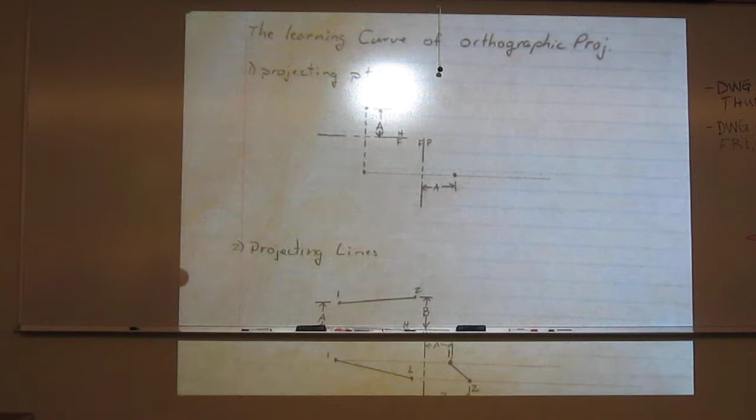Now, if you can locate a point, folks, and understand that process, then it's just another logical step to the next one, which is projecting lines. Because we're looking at geometric breakdowns, right? And a point is the base geometric unit that we have. Once we get that, it's not a huge step to projecting lines, because what's a line? It's the shortest distance between 2 points.

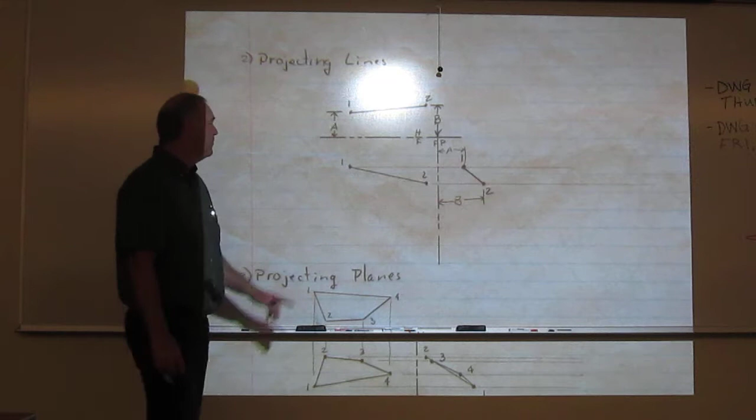So now we take 2 points, and we take just a line. We can project that, due to law 1, right into an adjacent view. Once we have those two, we can use the other laws to locate that in any other view. So we start with points. Does everybody understand points? How we project them?

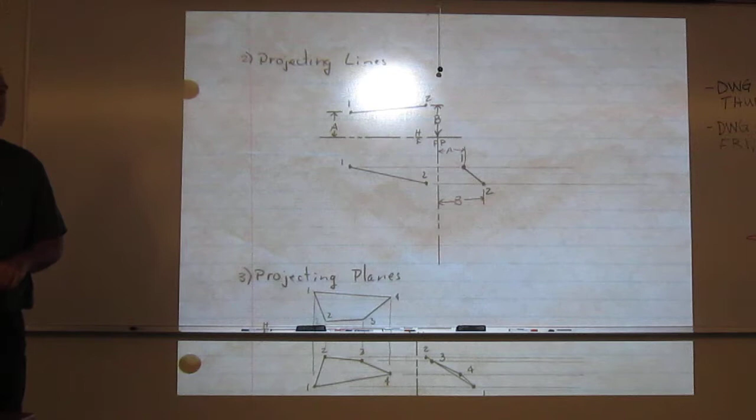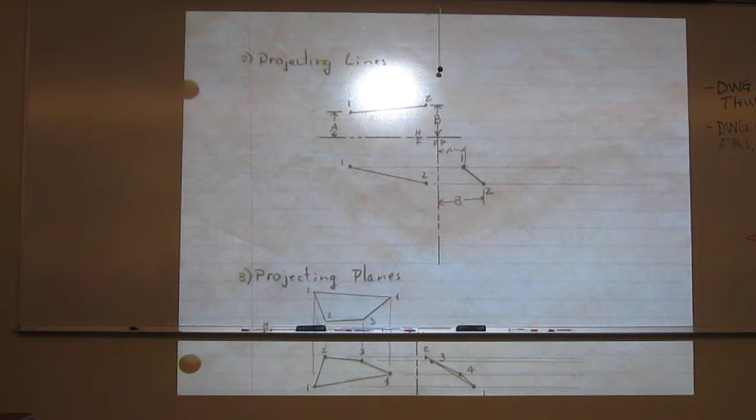Then lines are the next step where you're doing 2 points. Their level of complexity jumps by double, but it's still the same process, right? You're just doing it again. Then we go to planes, and planes can really have kind of an unlimited number of points, but there will be points or vertexes that define those planes.

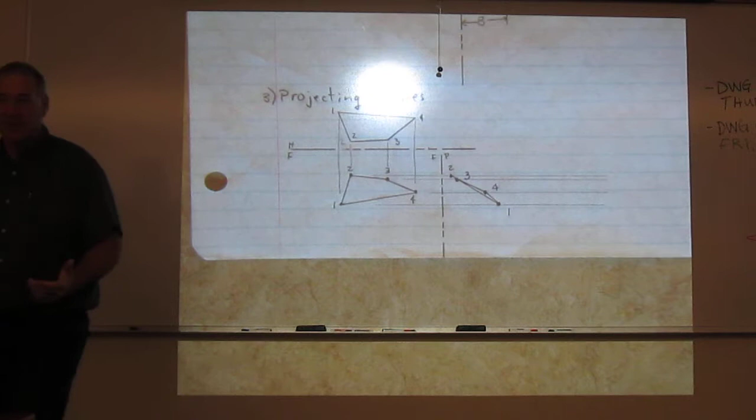Again, we can take these planes, instead of looking at the whole plane, break it into points, because we already know how to project a point. Now we might have 3 of them, 4, 6, whatever the case might be, but we use the exact same process all through it. At the end of it, we end up with a 3-view drawing.

So that's really kind of the learning curve, at least in my opinion. I know a lot of times people will start really at the third part here, where you're looking at planes and trying to project those. I think probably many of you have been very confused by that process. As you look at these planes, you wonder: what is this plane? Is it normal? Is it inclined? How's it going to project?

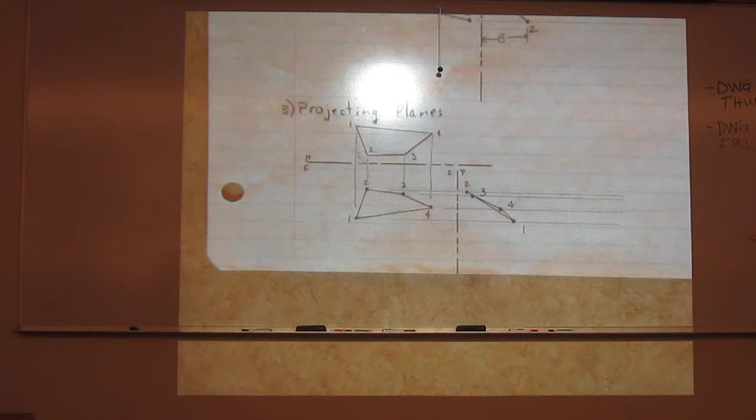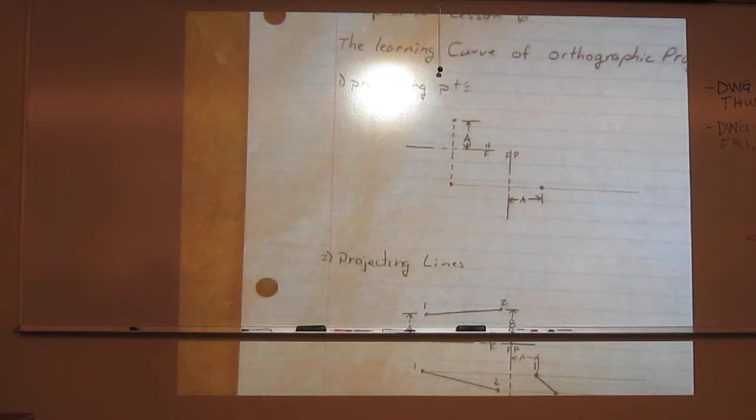Well, don't forget, you can break that plane to lines, and you can break that line to points. By doing that, then following the 8 rules of orthographic projection, you'll get a successful result when you do these. Now, the author has a bunch of stuff at the end of the chapter that might be useful for you in the visualization and application of these skills. We've talked about some of these already, but let's review them. First one, let's go to figure 1070.

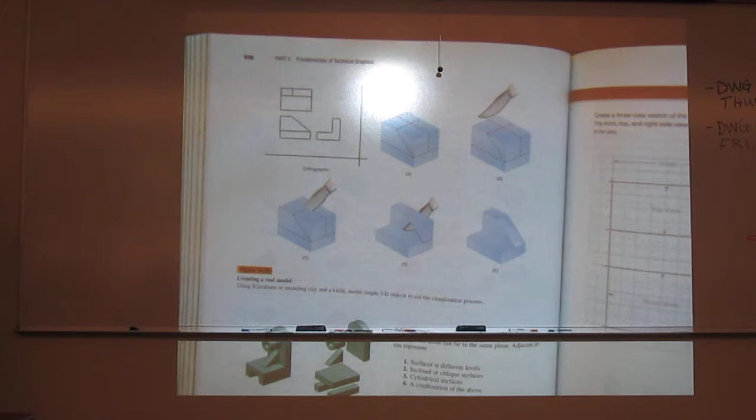So a visualization tool, clay. It's a pretty good process. I think some of you have really taken this on, and I would ask you out there, those of you using clay, is it useful to you? Sometimes if I get it right. If you get the clay model right. Okay. But if you do get it right, then it's extremely useful. Oh, exactly, yeah. And it's a process, kind of like the author states here.

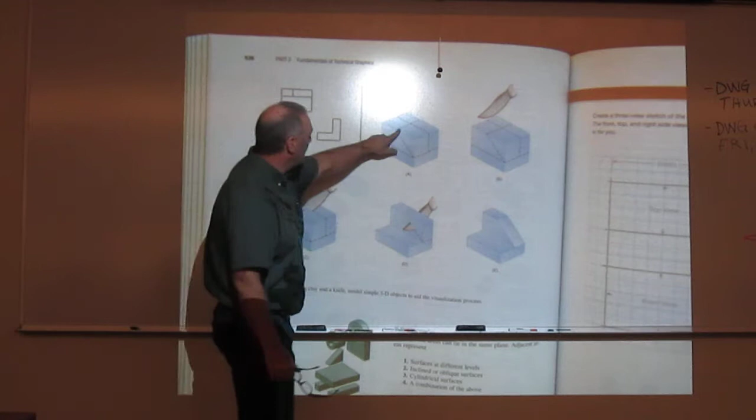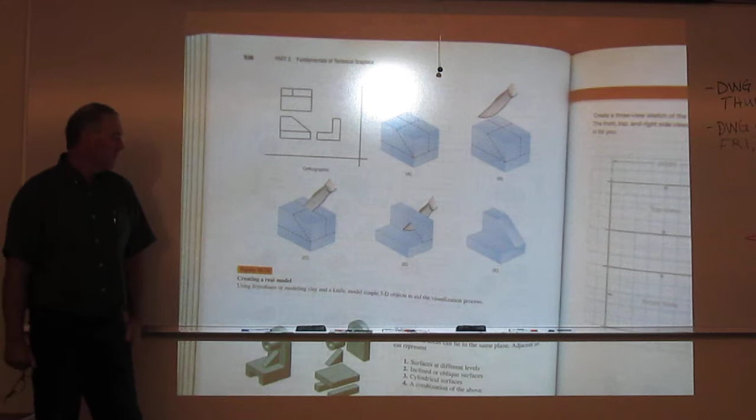The way to do the clay is start with some cube that has the overall dimensions. Take the tip of the blade and sketch your views on the sides that you pick. You're just taking the tip of the blade and outlining everything. They don't have to be exact with clay. You're looking for shapes and how they're going to appear. Then once you do that, you start looking for lines that match up. And you say, oh, that one's got to match here, so therefore those two are related. Now I've got the same vertex point between these two surfaces. By the time you get to the end of it, you got the completed result.

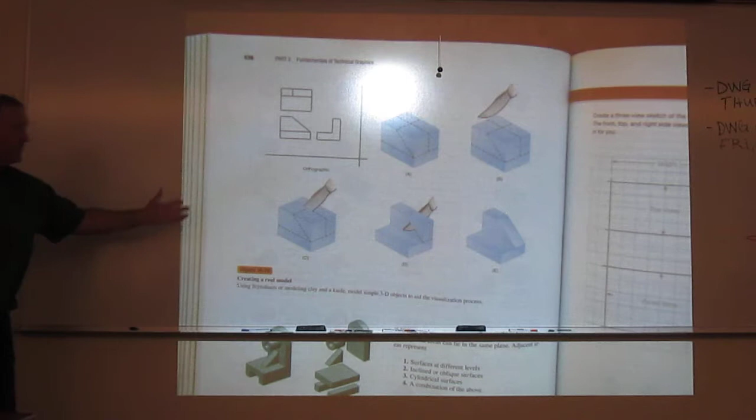Keep in mind, when you take the test on Wednesday, I'll allow you to use the visualization tool of your choice, because I think it's part of 3-view drawing. If you're using clay, since we don't have enough for the entire room, and we don't want a mad scramble for the test, because we only got so much back in the drawers, if you want to use that as a visualization tool, get your own. So clay models are a great way to go.

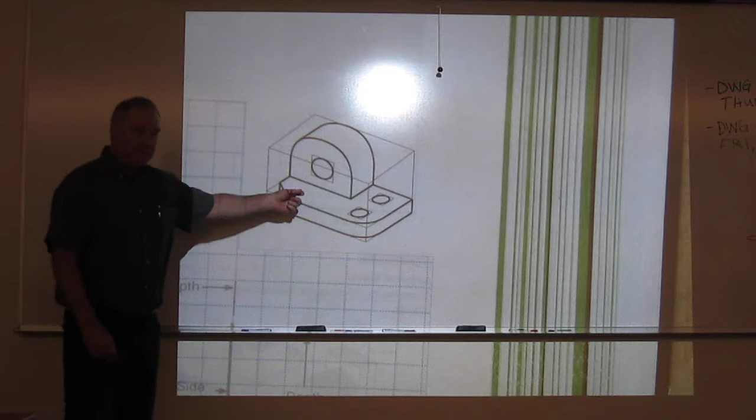Another way, and I think probably the majority of the class is using this one from what I've seen: sketch isometrics. It's really, in essence, the same thing as a clay model, but you're providing a 3-dimensional pictorial view so that it helps you visualize. Some of you are sketching these. Some of you are doing them on the computer. That's fine with me. And yes, if you do sketch isometrically on the computer for your test, you can use it as a tool. So this will be one where I don't make you close the computer down, but you can only use it for the visualization part.

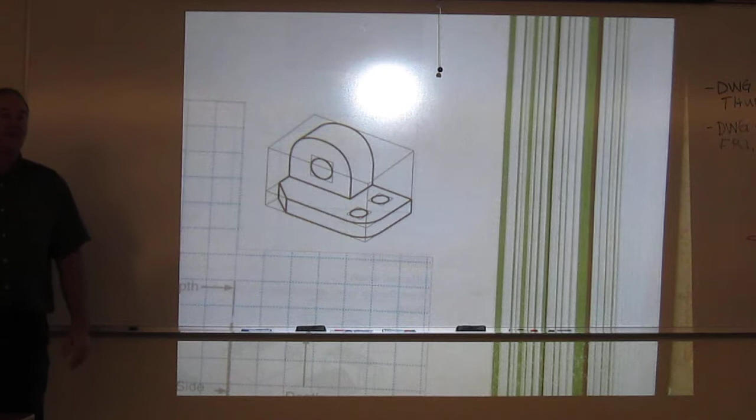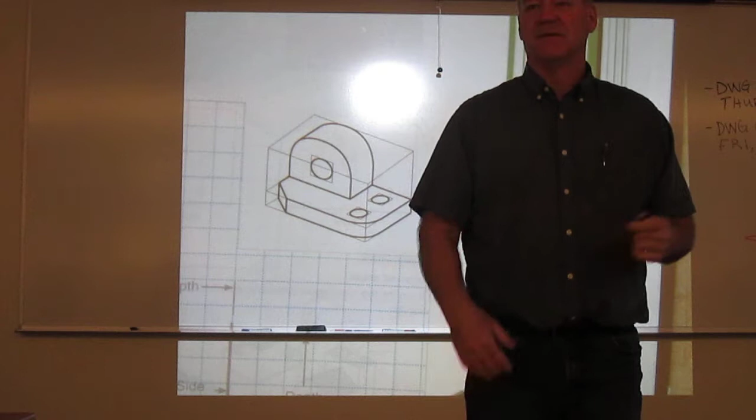How many people are using isometrics? Yeah, I thought at least half of you. You guys know we have a bunch of isometric grid paper back here in the drawers? Now, we don't have enough to just start wasting it. What really works well is grab a piece of vellum and set it over top of the isometric grid and then just sketch on it. That way you use the same isometric grid several times, and those little packets are fairly spendy as far as paper goes. So if you do that just to make it stretch a little further, that would be nice.

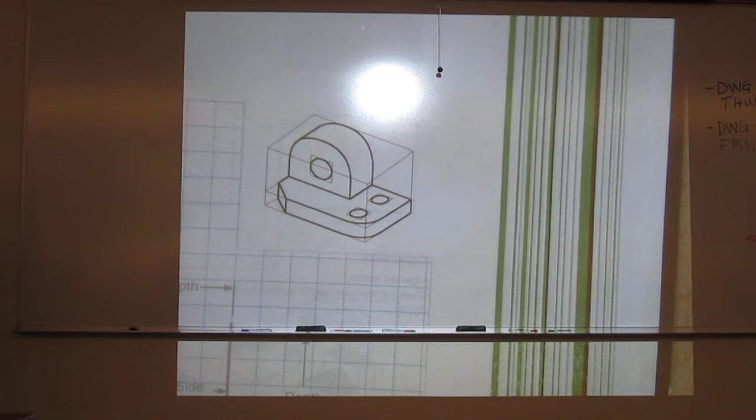I've actually even got a drawing that's an isometric grid that I print off real thick, and I can see it through bond paper, and I just sketch on bond. That's cheaper yet. Not that we need to watch the pennies that closely, but we do have to be economically viable. Isometrics, great visualization tool.

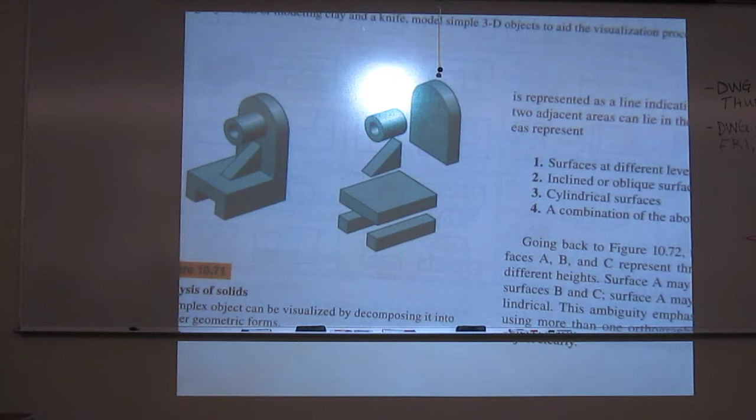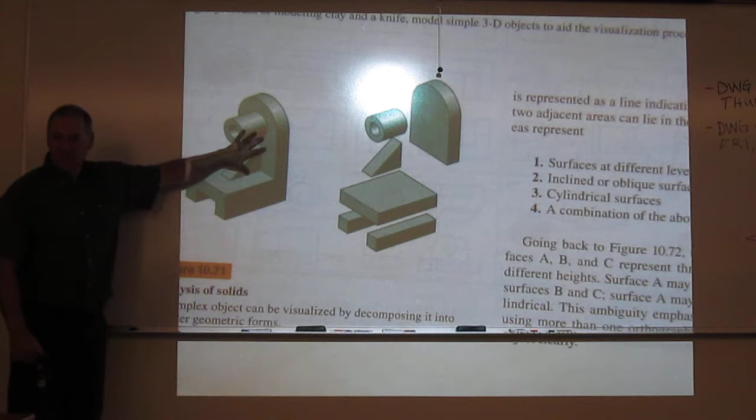If those two fall down for you, then the author gives you a couple other ones. We've already mentioned figure 10-71. We mentioned this way back in drafting 131, and I think quite a few of you deal with this. A couple of you, when we talked about drawing, said, I look for shapes. Well, do your geometric breakdown. Break your object into shapes: cubes, rectangles, triangles, circles. You might have positive shapes, you might have negative shapes.

But if you break them into these surfaces, then you can go back to some of these other pages we talked about, and you'll know how they're going to project. The other one I'm talking about is page 535. Because if I know what a circle appears as, I come right to page 535 and find, oh, there's a concentric circle cylinder, negative, positive. How's that going to project? In this case, this is a counterbore hole.

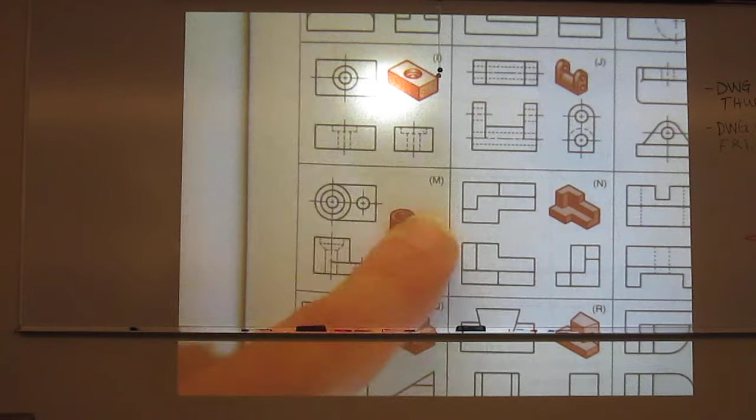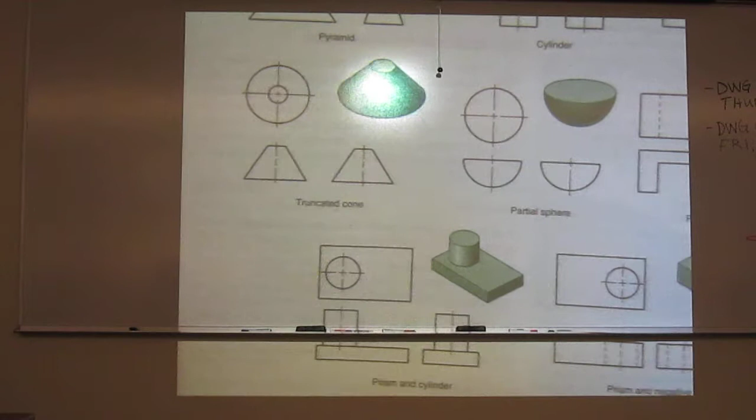So you can go ahead and look at those. There's another page that we also threw out on that didn't have all of the objects together. It had the individual shapes, and this was on page 522. Remember this page? Where we started looking at the different 3D primitives that we got back in 131 and then how they projected. So a couple good resources for you if you do the analysis by surface or the breakdown of objects.

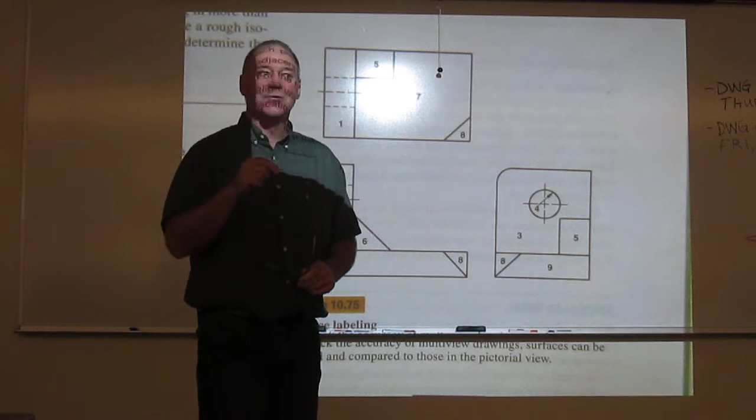The author brings a couple other items in. If you look at 10.75, these are kind of checks. They call this surface labeling. This is when you have a physical object or an isometric or a clay model, you finish your multi-view drawing, then go back and look at your individual surfaces. Just because you draw that last line, folks, on the computer, and you say, it looks good to me, print. It shouldn't go in that box.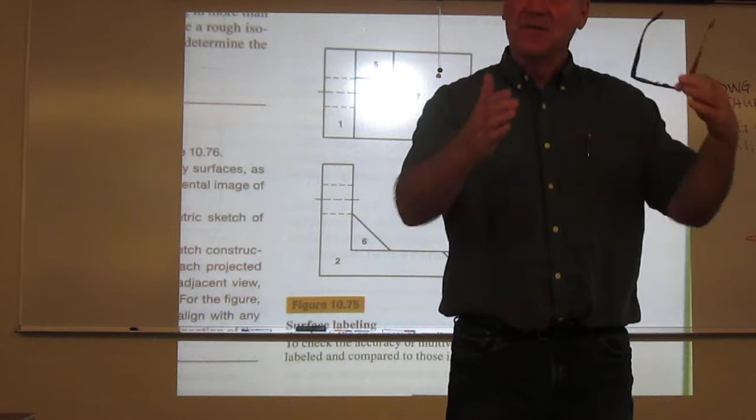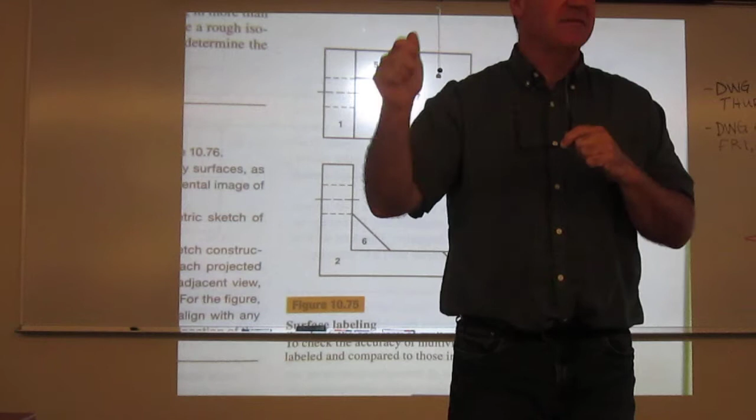You should pull it out, sit at your desk, put a scale on the thing. Does it really scale 1 to 2? Does it really scale 1 to 1? Okay, check all that stuff. There's really nothing more embarrassing than in workforce, turning in a drawing to somebody and they said, well, aren't we doing this at 3/4? And you got the thing at 1.5. Yeah, well, that was part of the instructions. So check that stuff. Make sure you got it right. Do a double check. Remember the old highlighter thing. Highlight that. That's done. That's done. That's done. Run it by a peer. Those things are all done in the workforce.

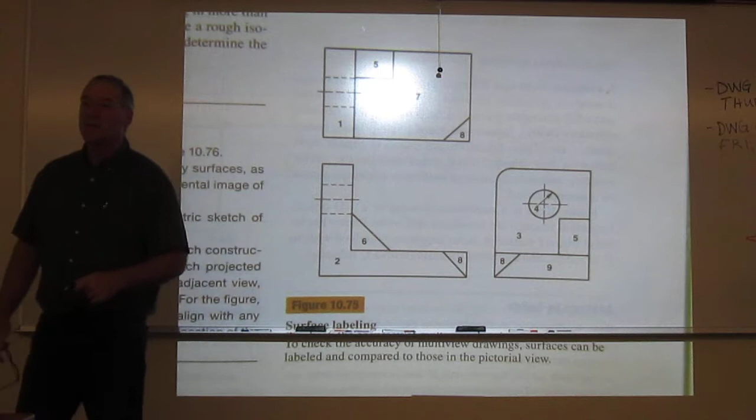Now on this one, what they're doing is they're just saying, okay, I'm going to label this surface 1, and then we'll go and make sure on my other one, this is what I'm getting. On the top, I got a rectangle, I've got an edge here, I've got an edge there. Yeah, okay, that's a normal plane, that's what I should be seeing. So I'm kind of analyzing it after I'm done. Doing a check. So analysis by solids, or surface.

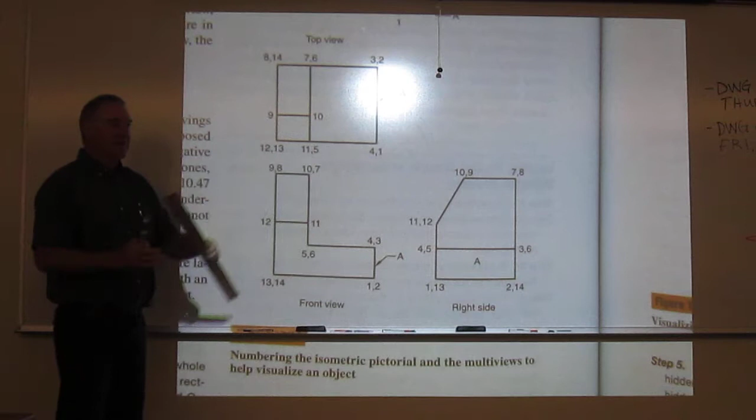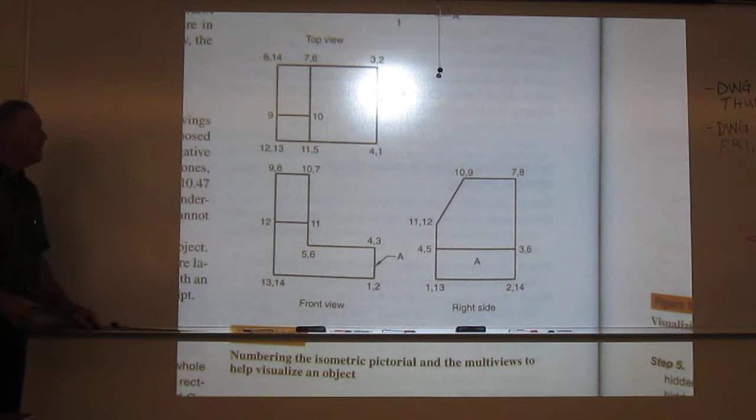So whenever you do this, put the point that is closest to you first, the one that's away from you second. So if I'm looking at this top edge, you can see 9's right here. Well, it's closer to me than point 8, which is at the back. Okay. And that will keep those in order for you. Again, point labeling. And when I get oblique planes and I have to do 3 or 4 rotations to display these things, this is really the tool that will keep my mind from going nuts, because I'll be able to track those numbers as I go through in these different rotations. Another really good technique.

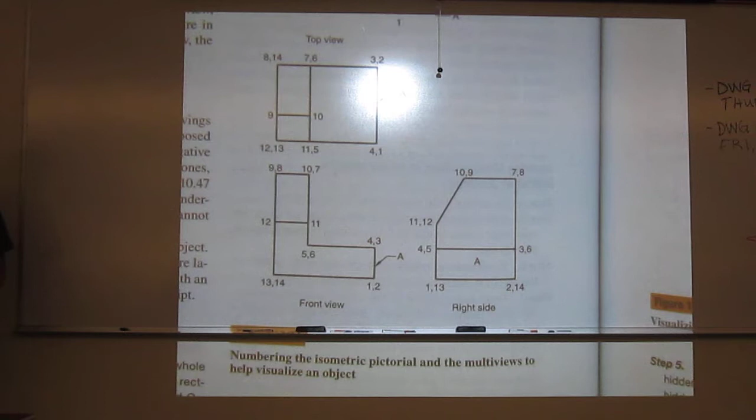That's the ones the author kind of gives you. Are there any others out there that you folks have just kind of found out on your own and say, this works for me? Or just draw it and hope for the best? Okay, well, those will give you a base. Again, these are just techniques the author's thrown out that a wide part of the population has success with. It doesn't mean it's the only way. Okay, like I've mentioned many, many times, all our minds are different. We've got to play with it. We've got to steal from one idea, steal from another idea, and blend them how our mind works. And use those to get a successful completion. And really, the only way to steal from these ideas is to try them. Give them a try.

All right, we have three things at the end of this chapter that we do need to talk about. And these are some conventions to clarify the drawing. Remember, when we do a drawing, really, all drawings need to follow only 3 rules. And that's the 3 C's. And we've listed hundreds of guidelines, and you use these guidelines to get to the 3 C's. Does anybody remember what the 3 C's stand for? Clear, concise. Yep. Clean. Clear, concise, complete. Okay. These 3 conventions we're now going to talk about are in the clarity stage. So when we get projections that are extremely confusing, we're going to do some things that break the rules of orthographic projection, but they clean the drawing up. Okay. That's what these 3 items are.

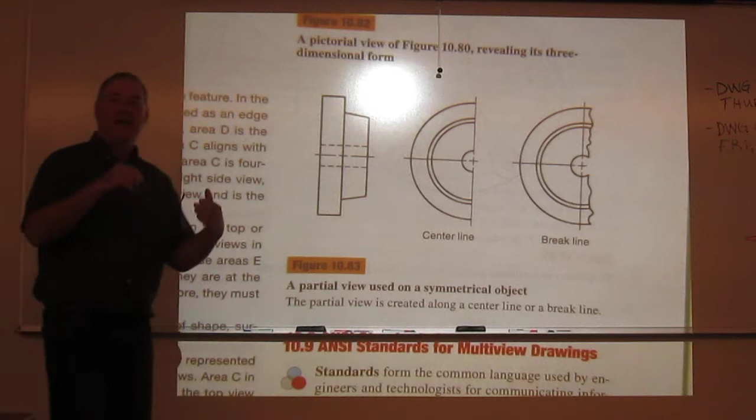So the first one is a partial view. Let's go to page 543, figure 10.83, and let's look at what a partial convention is. By the way, this is a convention. It is an accepted deviation from a standard, right? Our standard is the glass box, orthographic projection.

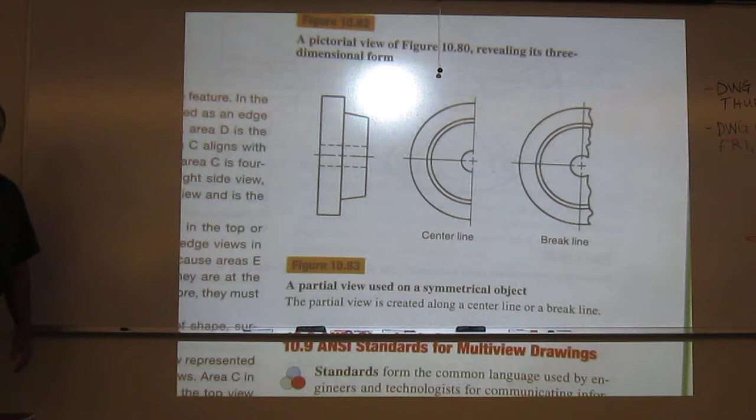Since it is a widely accepted deviation, we do not have to tell somebody when we pull one of these out of our toolbox and start to use it. Okay? It's just assumed that the reader will know. If they don't know, that's their problem, not ours. So the first one's a partial. We use a partial view when the original projection adds no new information or leads to a confusing projection.

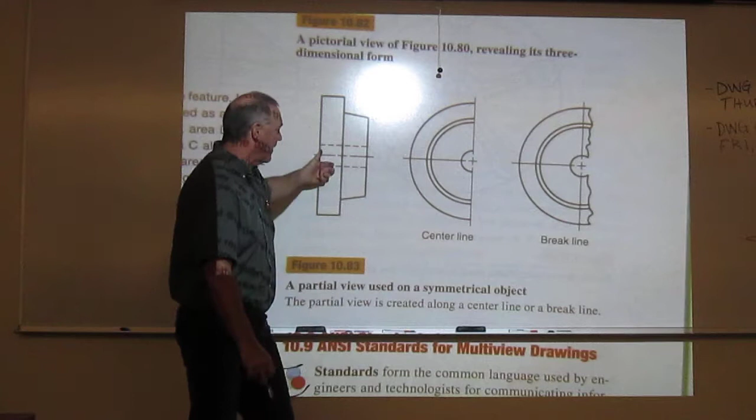So this is an example of doesn't add any new information. Here we have a front and a right side view. Okay. So this part right over here is symmetrical. Do we really need to show it? No, we don't. So you can break it one of two ways. You either break it on the center line and you leave half of it off. They know the information is right there for the whole thing. Or you take it slightly past it and you use a short break line to display that break.

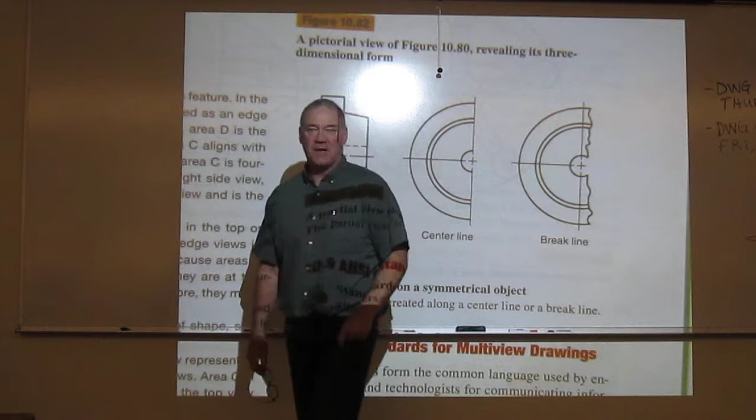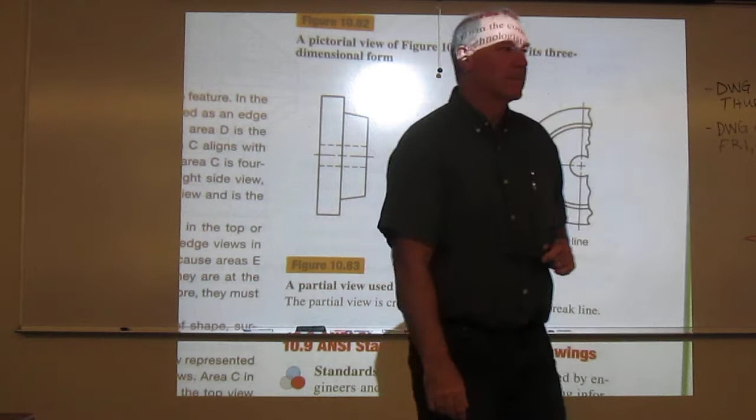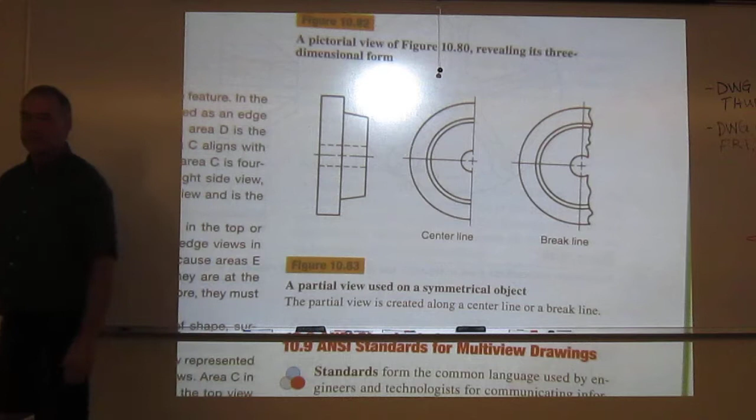Remember, a short break line is a hand-drawn line to represent how the object breaks, and it's very thick, right? It's on the border layer. So you can use either of these. Works great for symmetrical objects. It doesn't have to be a circle either. It can be any symmetrical object. So this is a good one for circular things, or, as I said, symmetrical. There's another example on the next page at the top.

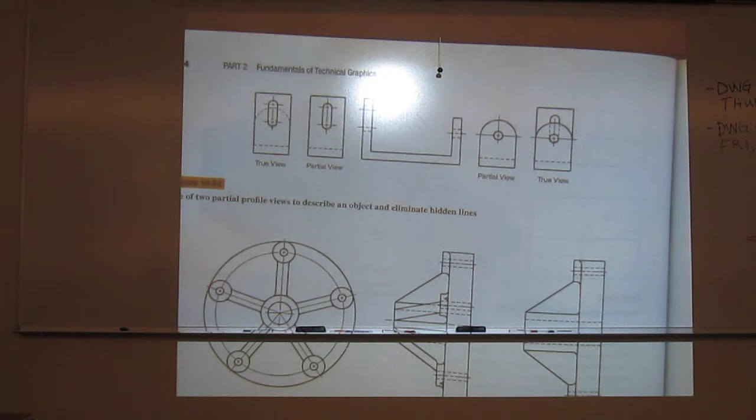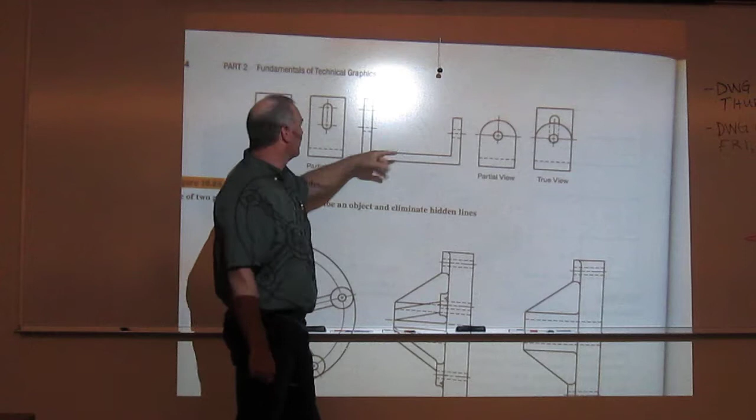This is on the partial views. This is really probably the one I use the most. So in essence, we're given a front view. Here's our object. It's got a couple arms coming up for some reason. I'm guessing that maybe a shaft goes through here or something like that. So here's our front view. This is the true projection, where we see this one right here, and then right behind it here. Now, that's a pretty confusing view, because everything kind of lines up, and you start thinking this surface is here, this surface is here. No, it's not. It's completely on a different portion.

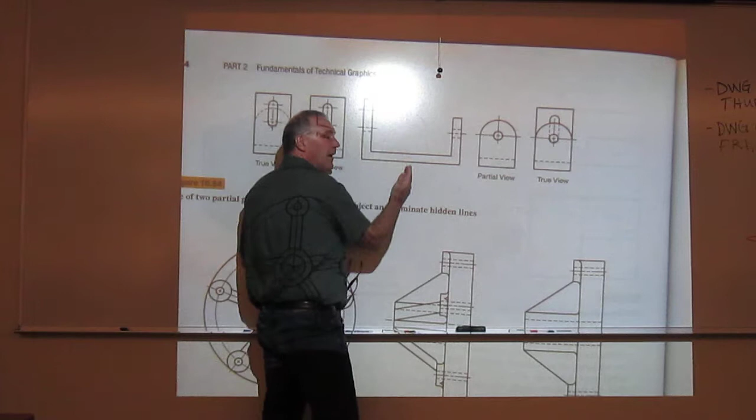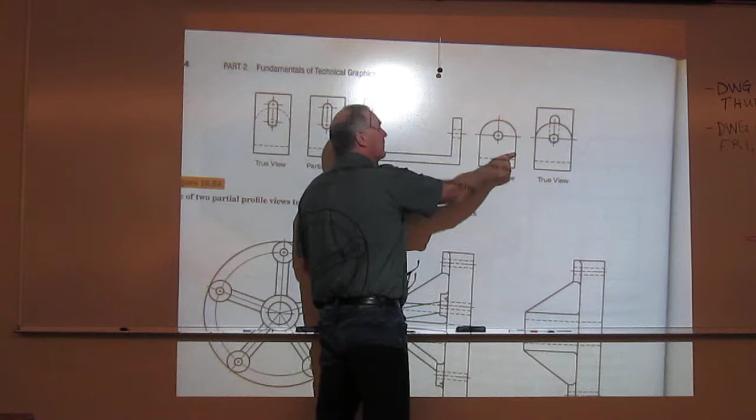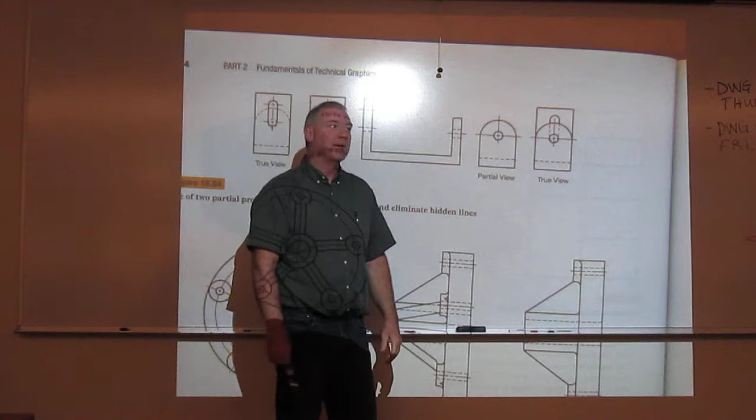And so what we end up doing is we end up just kind of breaking the object right here in the middle. We're going to break it, we're going to rotate it, and only display that portion. So they turn it, get it to here. That's real easy to read on that end. Fairly simple construction. Much easier to identify what we're trying to build, I guess might be a better way to say it. Then we turn the left side view for this one. Now we're given two great looks at that one and that one. No mistakes are going to be made. Easy for them to read.

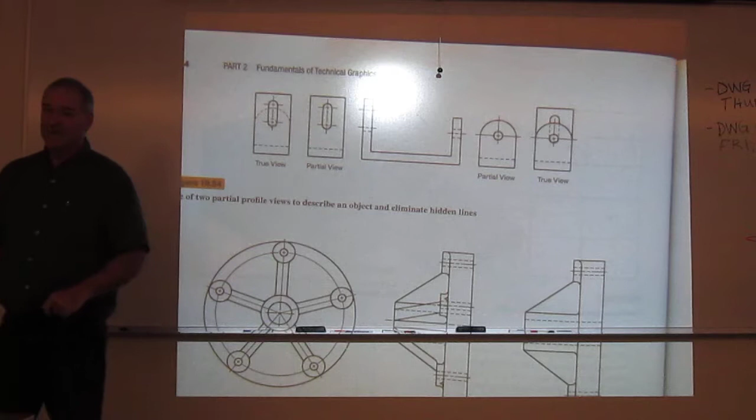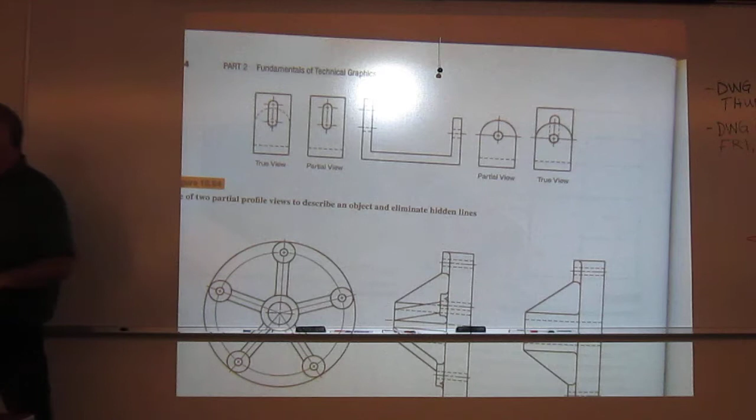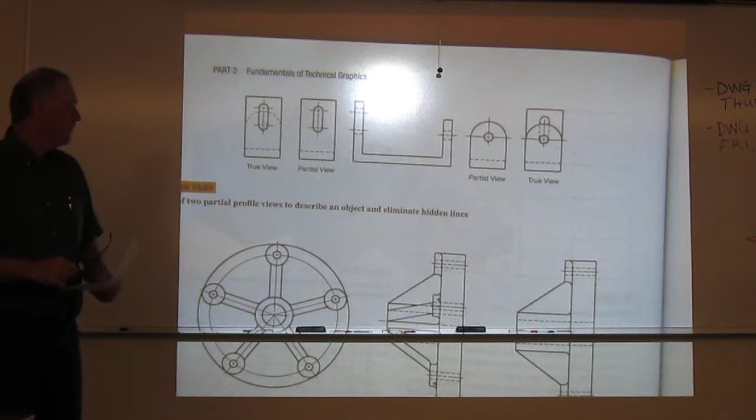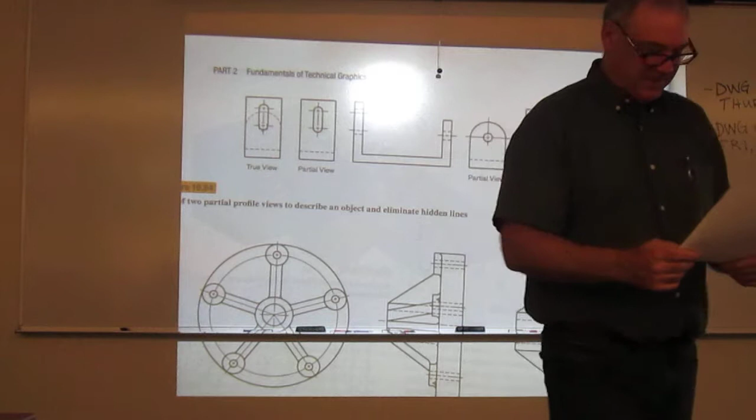Okay. Here's my true definition. Object not entirely shown due to confusing projections or redundant information. Maybe I should have read that. The first example was redundant information. This one's a confusing projection. So let me state that again. Object not entirely shown due to confusing projections or redundant information. So you'd use a partial view in the place of a multi-view. Yes, you're still doing orthographic projection. But if we were looking at a left side view looking this way, this is the true projection the glass box gives you.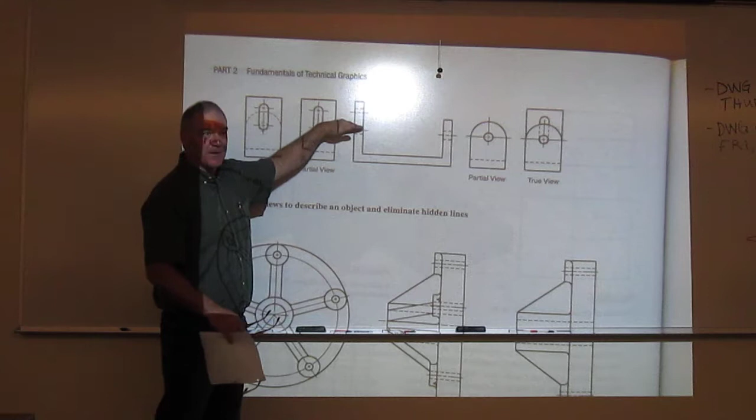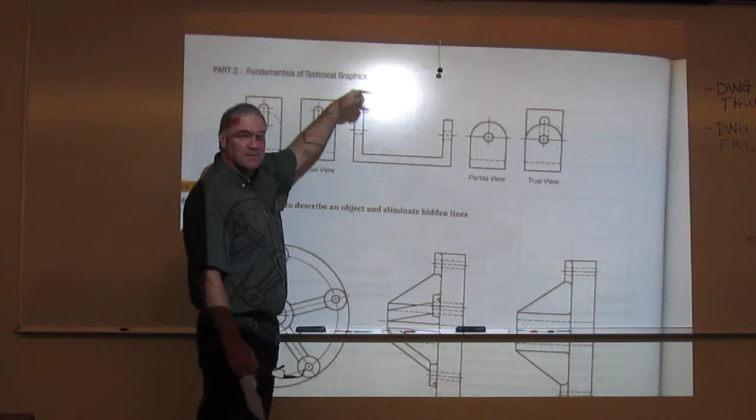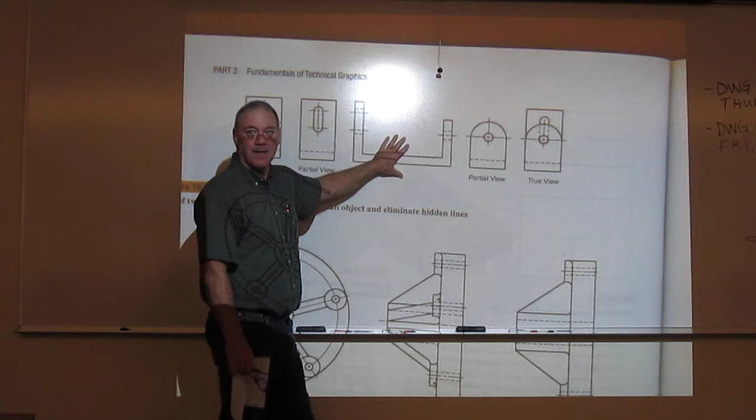So what we're going to do is just chop it off. Boom, I'm just going to go here. I'm only going to rotate this over, give them that projection. Now this one requires three views, maybe even a fourth because I got depth; I might do the top also. But I'm getting the front view. That gives the orientation of these arms in relationship to the base. They've got that information. Then they only need information on this guy and this guy. So we're going to rotate this one and that one as opposed to the true projection, because they're confusing. Okay, do you get it now? Yep.

Bottom line is you can pull this out of your toolbox in more than one place. By the way, I love drafting toolboxes. They're light, but they do get pretty filled up and cluttered until we get really used to these things.

Any questions on these? The partial convention: the object not entirely shown due to redundant or confusing projections.

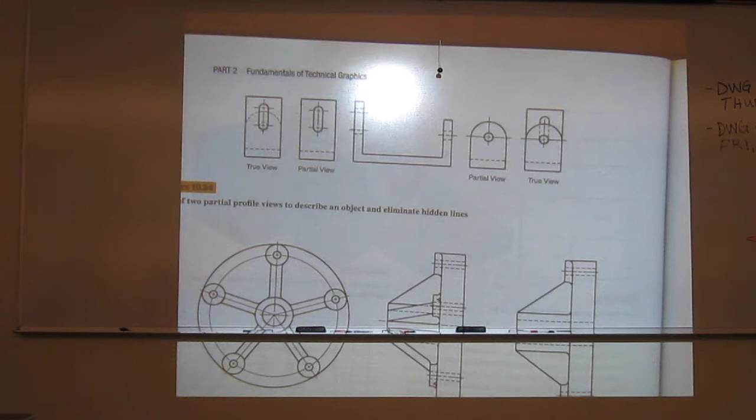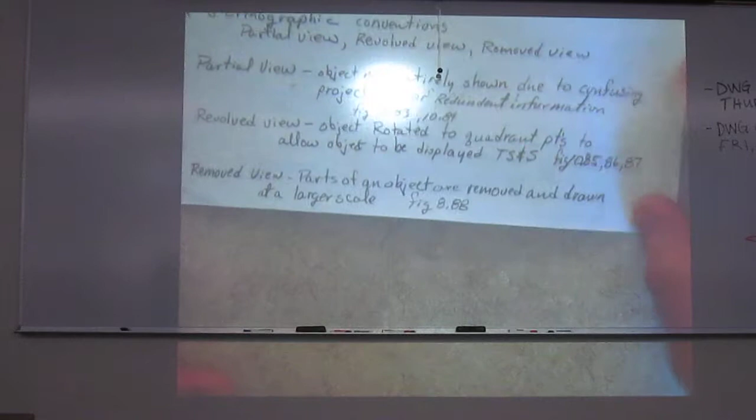The next one is the revolved convention. I'm going to put my definitions up here so I don't butcher them again this Monday morning. Revolved convention: object rotated to quadrant points to allow the object to be displayed true size and shape.

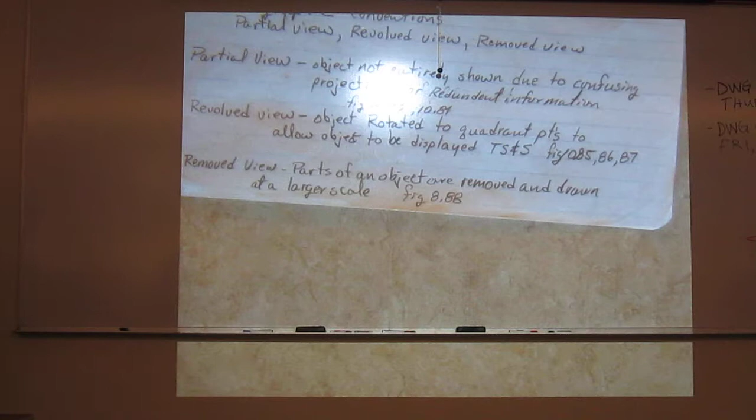This is one you're almost always going to do when you have things about a center point, which there's a lot of. Just so you know, think about why there are so many objects that are on a center point. You've drawn quite a few of them. Why are there so many objects that have a center hole with things rotating outside of it? Why?

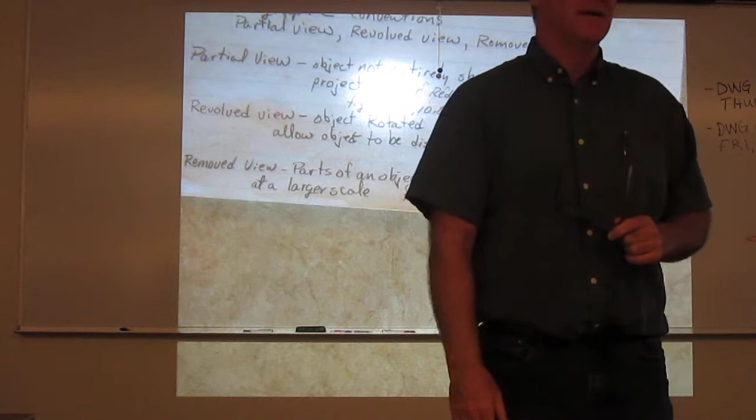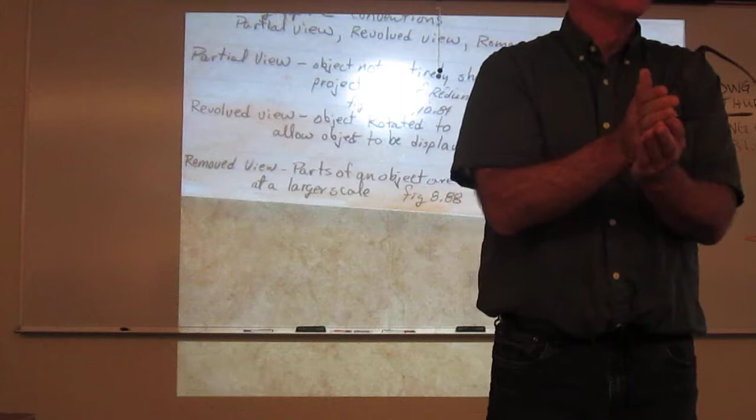Think of how we power stuff. The internal combustion engine has only one power source, and you run a heck of a lot of things off it. There's one central shaft that turns, and it's powering a whole bunch of devices. Electric motors, same thing—they're all rotary, right? They all turn. Therefore, most of our power-driven devices come off of shafts. That's why we get so much of this stuff.

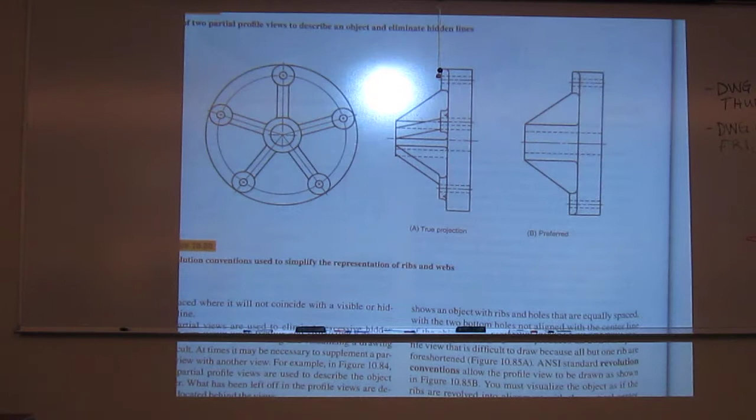All right, let's go look at this in action. Figure 10.85. Now 10.86 is the one that really points it out. So here I have some flywheel of some type. I'm guessing a shaft comes in here. These things are attached to something and it's turning.

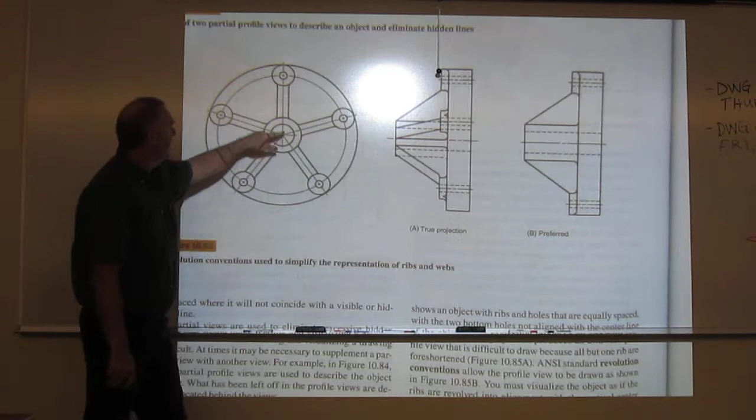Well, here's your true projection. Keep in mind that every one of these spokes—this one, this one, this one, this one, this one—they're all identical in length and where they meet. If you project that over, we get a true projection on this top one right here, so we see the distance from the center to here, only on the top one. Due to the projection, you start seeing this guy, and they look at it and say, well, why is this one much shorter? It's somewhere else. Or this one doesn't go to the quadrant point—because it's just not looking right.

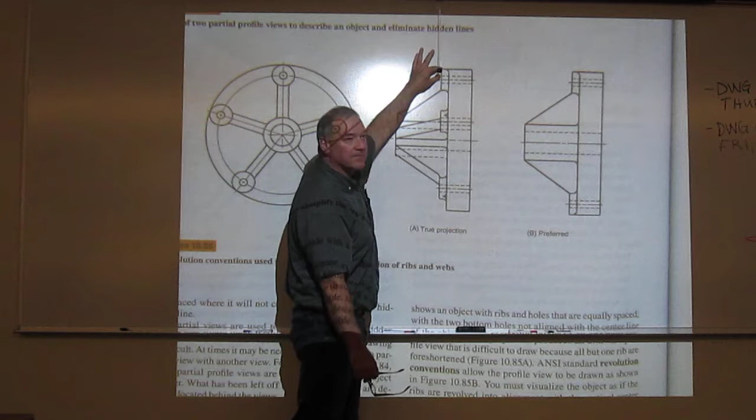And you notice the distance of the hole from here to the edge versus here to the edge. Is this distance right here from the center of this hole to the edge the exact same as this hole to its edge? It is, it's the same distance. The projection doesn't look like it though, because it's a foreshortened surface.

So what we do when we get these types of things is say, you know, this is going to confuse the heck out of somebody. All they really need to know in this view is the distance from the center to the center of those holes. So we get rid of all these arms—we take this one and rotate it down to the bottom. We do it in our minds: we're just going to take this guy down and put it right here. Then we're going to project only this one and this one, just those two.

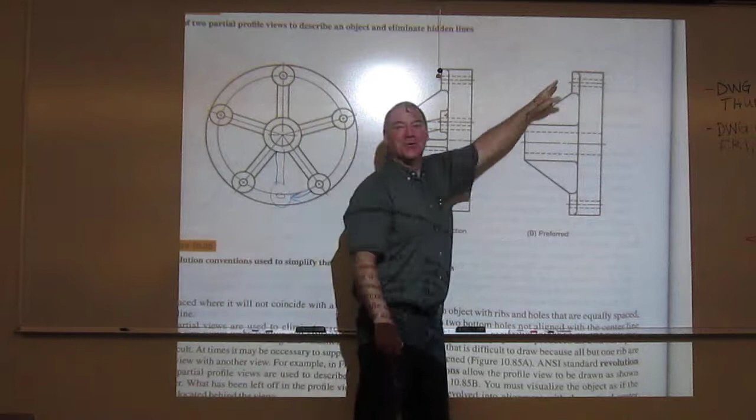Much easier to read—the sides are true size and shape versus foreshortened. No mistakes are going to be made. Keep in mind, they'll still have this view; they know there are 5 of them out here, even though you're only showing 2. They know that—they've got this. This is the revolved convention.

Why do you have to put 2? Why isn't it 1? Well, this is an object I would maybe even think about doing a revolved or a partial convention to get rid of all this misleading stuff, because this is all misleading. Now, I do need this information right here.

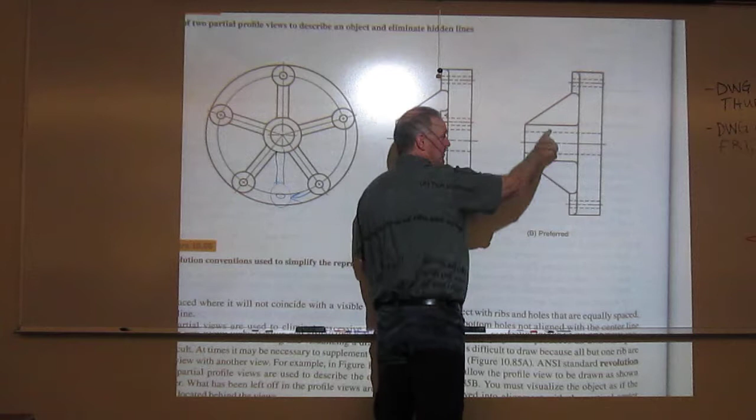So if I was doing a partial, I would break this somewhere down in here so they can see the thickness of this negative cylinder. That way there's no confusion—they wouldn't think that has to be straight, and then you'd have to monkey around with 5. No, they've still got this view, so they know it's revolved. Yep, they know it's revolved.

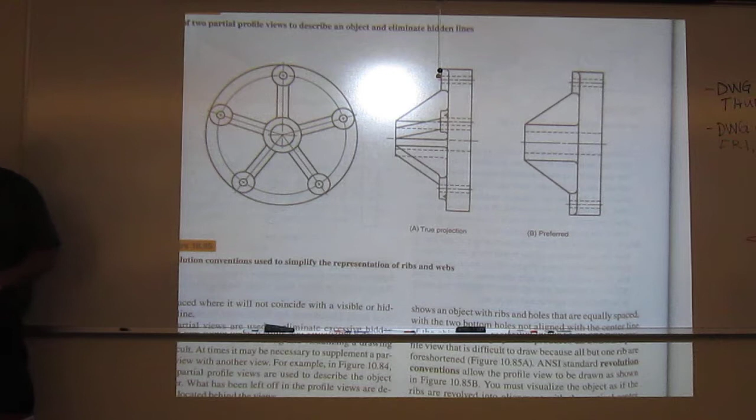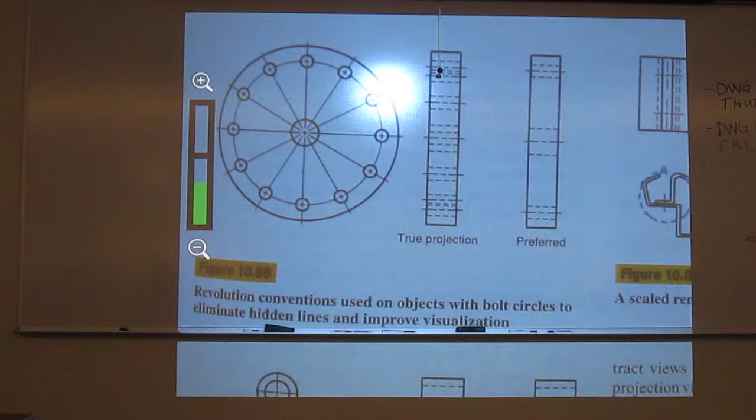I think the next figure really brings that out—look at 10.86. How would you like to decipher this view right here?